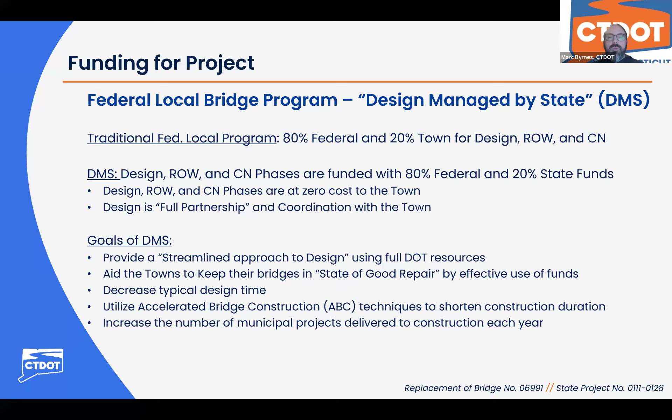I'll now turn it over to Maureen Nicholson, First Selectman in the town of Pomfret, for some remarks. Maureen?

Good evening. Hi, Maureen Nicholson, First Selectman, Town of Pomfret. I want to take a few minutes to express my appreciation for the Federal Local Bridge Program and its support in replacing the Day Road Bridge at no cost to Pomfret taxpayers. This investment delivers a meaningful benefit to our community by eliminating significant financial burdens on local residents while addressing critical infrastructure needs in a timely and responsible manner. In conjunction with the replacement of the Taft Pond and Bosworth Road bridges, this project represents a comprehensive and forward-looking effort to strengthen our town's transportation network. These improvements will substantially enhance safety, reliability, and accessibility for residents, emergency services, and local traffic.

Equally important, the longevity of these new structures, designed to endure for decades, will help stabilize future infrastructure costs and reduce the likelihood of costly emergency repairs. We've experienced both of those. This long-term view ensures that Pomfret is not only addressing current needs, but also planning wisely for the future. Thank you to the team at CHA Solutions and Connecticut DOT and everyone involved in making these critical improvements possible. Your dedication to investing in resilient, high-quality infrastructure is deeply appreciated and will have a lasting positive impact on the Pomfret community for generations to come. Thank you very much.

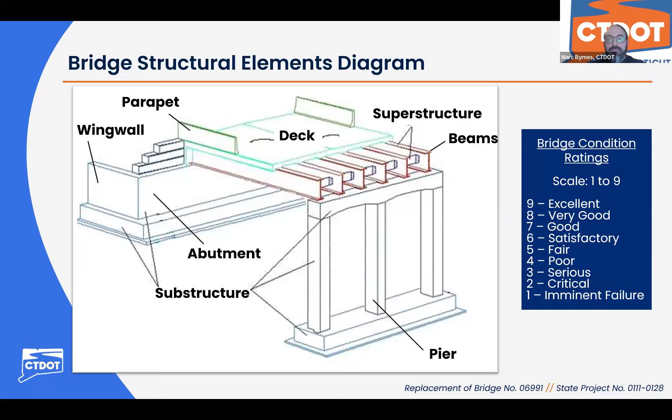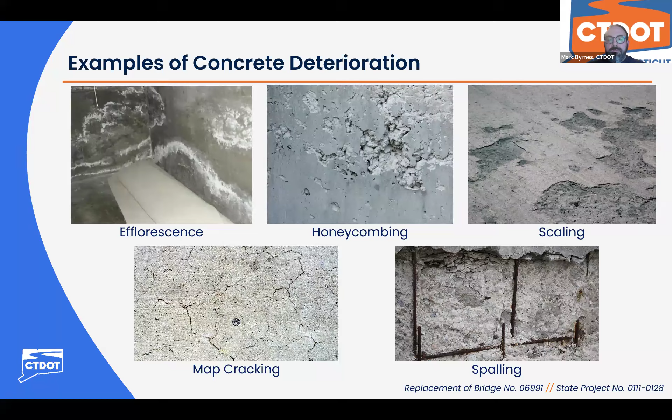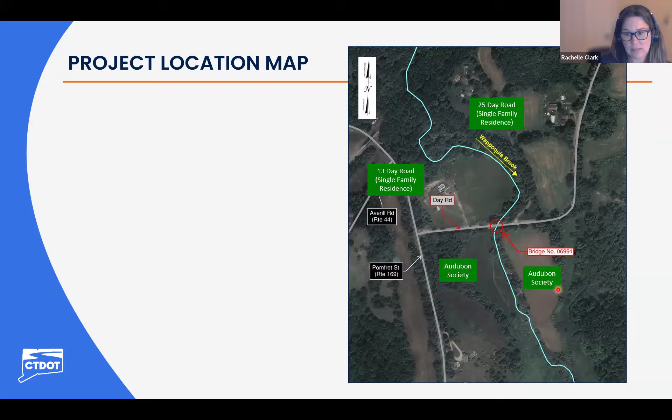Thank you very much, Marc. Bridge 06991, Day Road over Wappoquia Brook, is located approximately 50 feet east of Pomfret Street, Route 169. Wappoquia Brook runs from north to south below Day Road, which is oriented east-west. The bridge is adjacent to two residential properties, 13 Day Road, a single-family residence, and 25 Day Road, also a single-family residence, to the northwest and northeast of the bridge. Both the southwest and southeast properties adjacent to the bridge are owned by the Audubon Society.

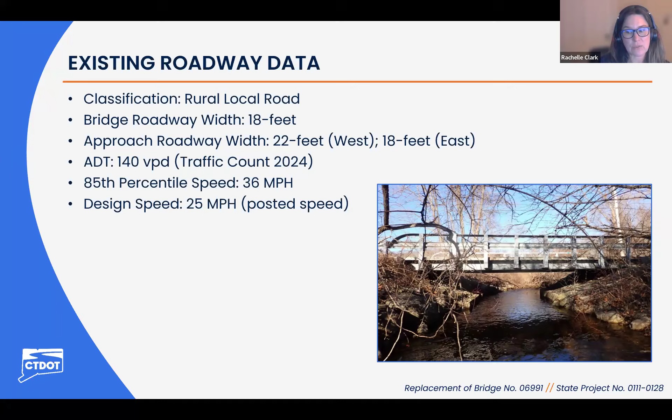Day Road is classified as a rural local road and has a bridge roadway width of 18 feet. To the west, the approach roadway is slightly wider at 22 feet, and to the east, the approach roadway matches the bridge at 18 feet. The traffic volume for this bridge is fairly low, at 140 vehicles per day. The 85th percentile speed is 36 miles per hour, meaning 85% of cars going over the bridge are at or below this speed. The design speed for the roadway is 25 miles per hour, which is also what is posted.

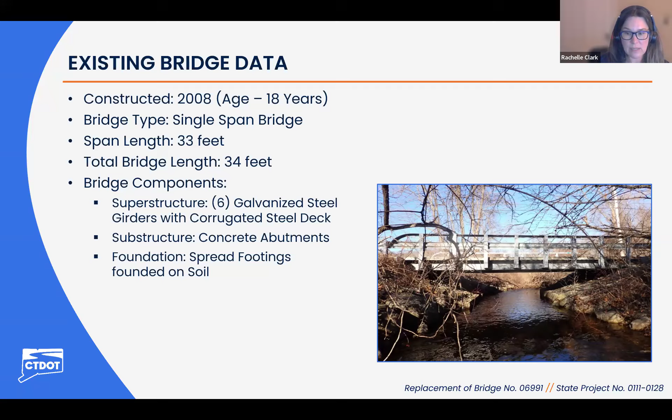The existing bridge is 18 years old and is a single span bridge, meaning it does not have any intermediate supports across the river. The bridge span length from center of support to center of support is 33 feet, and the total length of the bridge from bridge joint to bridge joint is 34 feet. The existing bridge is comprised of 6 galvanized steel girders supporting a corrugated steel deck, topped with bituminous concrete, frequently called asphalt. The substructure is comprised of concrete abutments and spread footings, which are founded on soil.

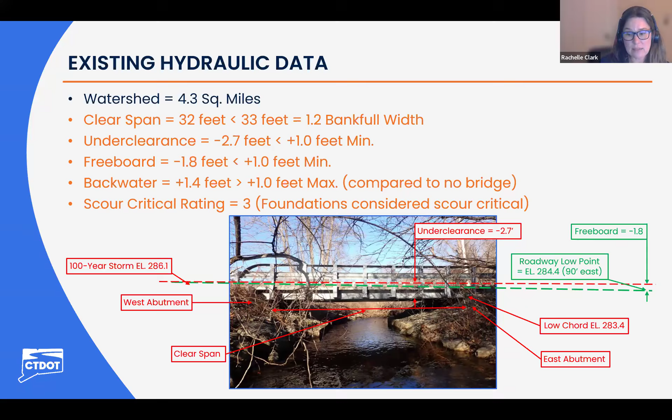The final criteria is related to the susceptibility of the bridge foundations to be undermined during a large storm event. This bridge has spread footings founded on soil, and they have been determined to be scour critical. This means that if there was a large storm, there's potential for some of that soil supporting the footings to be washed away. This is one of the primary reasons this project was undertaken.

Next, we are going to go over the condition ratings for this bridge, based on the latest inspection report, from 2023. As Marc discussed, condition ratings are from 1 to 9, with 1 being low and 9 being high. All of the components of this bridge, the deck, the superstructure, the substructure, the approach, the channel and channel protection, are rated as satisfactory, which is a 6 or above.

One thing to note is that these are condition ratings, and the bridge railing, while in satisfactory condition, does not meet current safety standards. Another thing to note is that while the bridge is in good condition, it does have a weight restriction. Trucks that weigh more than 31 tons cannot cross the bridge. As noted, this bridge is scour critical, so this project was not undertaken because the bridge has an excessive amount of rust or the substructure concrete has deterioration. This project is being driven by other criteria.

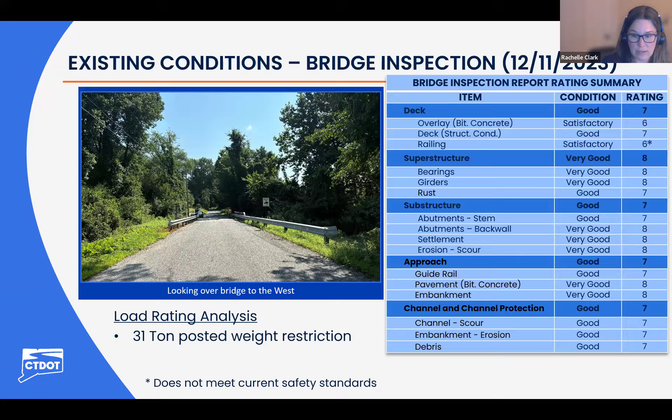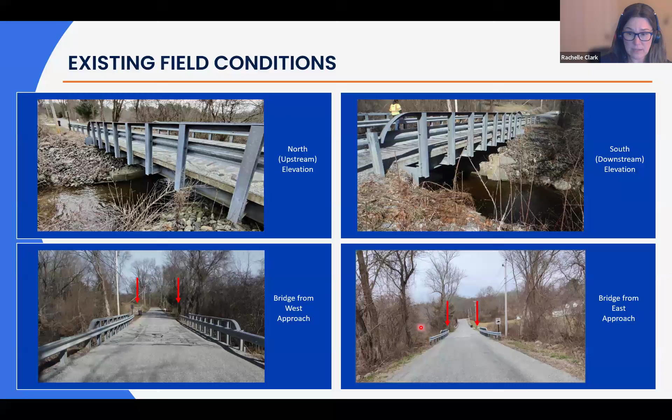The two red arrows show the locations of a residential driveway for 25 Day Road on the north side, and the arrow on the right is the location of a field access drive to the south onto Audubon property. The bottom right photo is looking across the bridge to the west. The red arrow on the right is the residential driveway for 13 Day Road, and the left arrow is the location of a pedestrian pathway onto Audubon property.

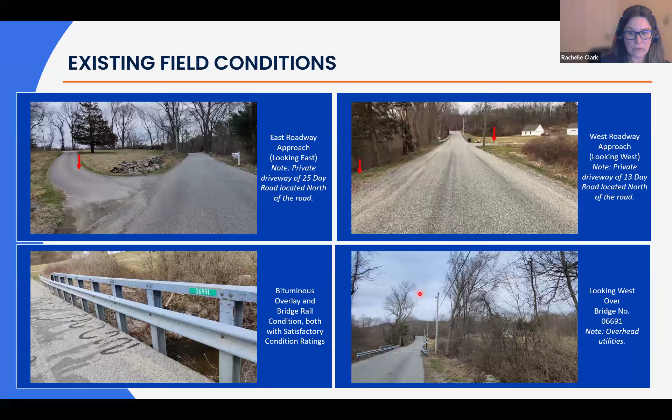And the bituminous overlay. You can see some of the repairs that have been done to that, which is also in satisfactory condition. Finally, the bottom right photo shows overhead utilities on the north side of the bridge. These will need to be temporarily relocated further north so as not to interfere with construction activities.

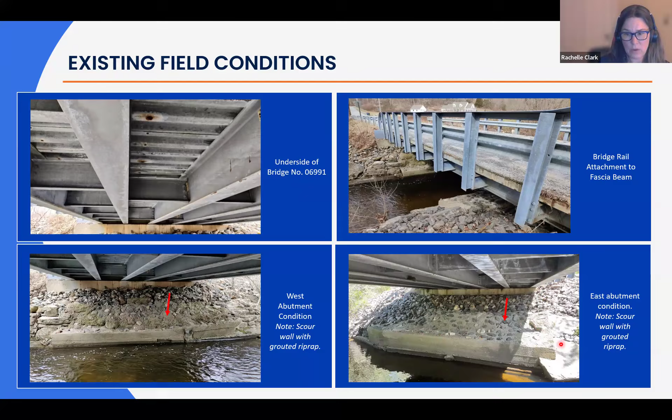You can see that portion right here. There's just a small amount of it that's not underground. The same on the other abutment. There's a small portion of the abutment that shows right where the bridge bears on the abutment. These two also show areas of partially grouted riprap and scour walls that are present along the river embankments.

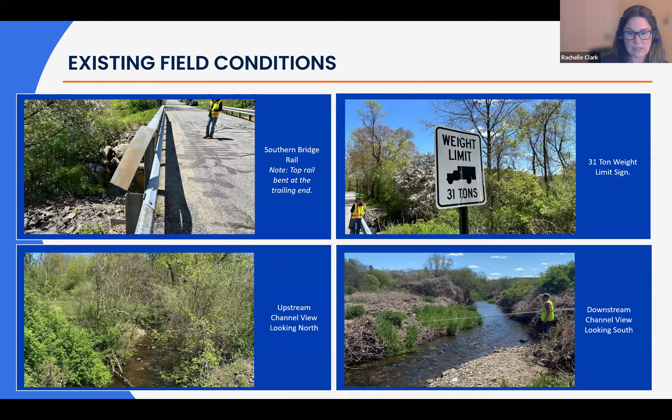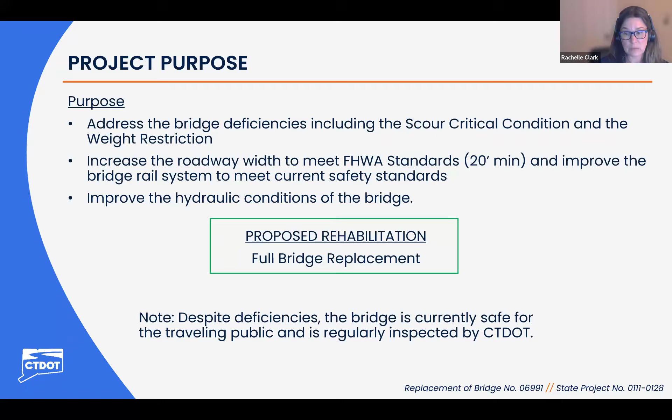The proposed rehabilitation is a full bridge replacement, as this is the most cost-effective way to address the scour critical condition. Options for just addressing the scour critical condition and strengthening the bridge were investigated, but were found to be more expensive than a full replacement.

The bridge will also be designed for potential scour in large storms, eliminating the scour critical condition. We were limited in how much the elevation of the bridge could be raised, but even so, we were able to achieve small improvements in the hydraulic adequacy of the bridge.

Speaking in more detail about the aesthetics of the bridge, the project proposes using a formliner for the end walls and the wing walls that simulate stone masonry. This will look similar to the photo in the slide. The open bridge rail will also be metallized to the color of the town's preference, which is dark brown.

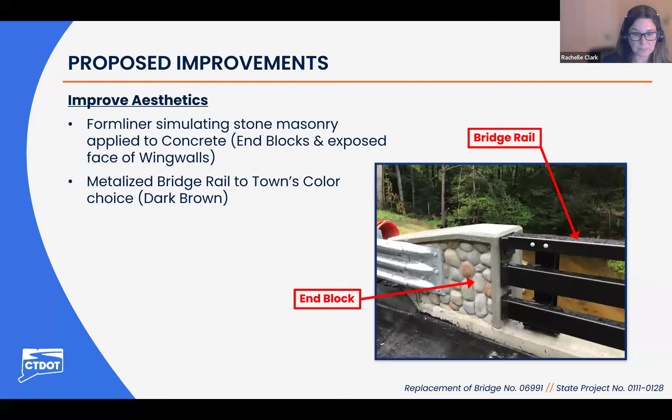This is a cross-section of the proposed bridge. You can see that there are two 10-foot lanes providing a 20-foot curb-to-curb width required by FHWA. The out-to-out dimension of the bridge is 23 feet 6 inches.

A three-tube bridge rail is mounted on each side of the bridge, supported on a concrete curb. The roadway will be supported by 3 inches of asphalt over a 6-inch topping slab, which is in turn supported by 7 prestressed concrete adjacent deck units.

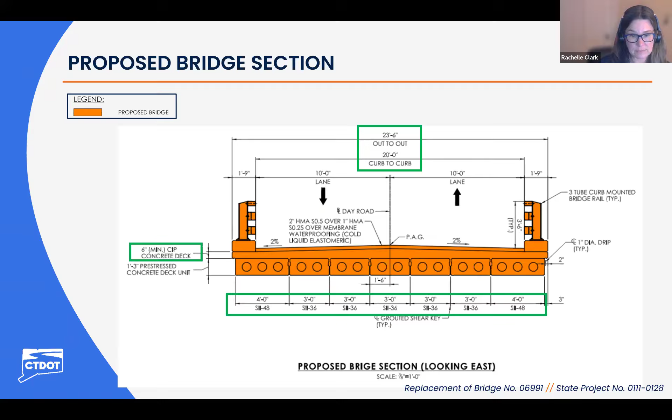This is the proposed bridge plan, a bird's eye view looking down on the bridge. The dark orange colors the bridge and the yellow indicates the approach roadways. The proposed bridge has a length of 36 feet from center of support to center of support. Below the bridge, the clear span between the faces of the abutments is 33 feet.

In this plan, the light blue, a cyan color, is the Wappoquia Brook, and the purple areas on either side of the brook are wetland areas, which are an important natural resource. The medium blue areas indicate riprap, which will be installed for bank stabilization.

The areas of light orange are where the surface of the ground will be lowered by cutting in and removing the soil, and the areas in light green are areas that will be raised by infilling with soil. This work will be done to smooth out the grades around the bridge to avoid overly steep slopes.

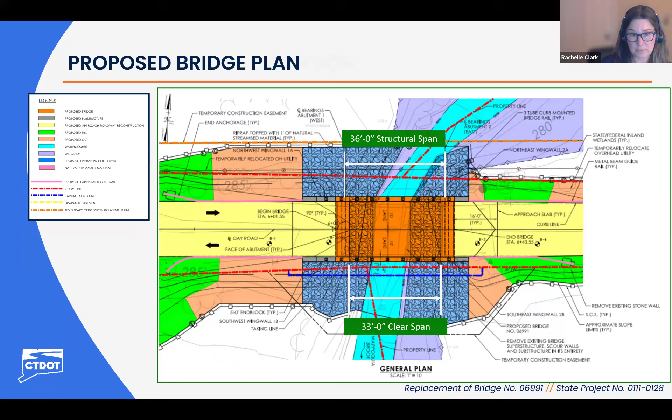This is a view of the elevation of the bridge looking to the north. The orange indicates the bridge, and you can see that the span from center of support to center of support is 36 feet. This is slightly longer than the existing span, which is 33 feet.

The areas in pink are the guide rail along the roadway approaching the bridge. Gray indicates the substructure. What is important to note about the substructure is that it is supported by steel micropiles, which are socketed into bedrock.

This is what's going to support the bridge in a large storm event and removes the scour critical condition that the existing bridge has.

Also in the gray area, you can see that we have shown the end blocks and the wing walls with the simulated stone form liner. The light blue cyan area, again, is the Wappoquia Brook, and the blue is the riprap bank stabilization.

You'll also notice a light pink area. That is natural stream bed material that will top dress the riprap in areas where the stream will flow under normal conditions. As I noted before, we were limited in how much we could raise the bridge, but our hydraulic criteria does see some improvement.

For the proposed bridge, the 100-year storm elevation is 285.3 feet, which is just about at the height of the roadway. The underclearance of the bridge is negative 2.3 feet, the freeboard is negative 1.1 feet, and the backwater is 0.6 feet.

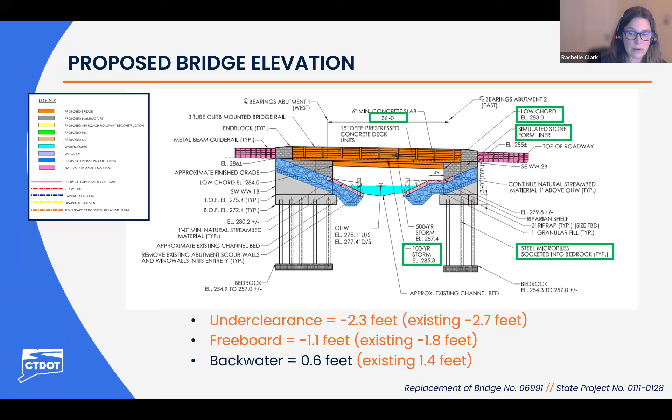Overall, each of the criteria were improved, and the backwater now meets the desired design criteria.

This is a plan view of the roadway. Again, we have Wappoquia Brook shown in the light blue cyan. The wetlands are shown in purple.

The areas of riprap bank stabilization are shown in blue. The bridge itself is shown in orange with the reconstructed approach roadway shown in yellow. North and south of the roadway, we have areas of fill in light green and areas of cut in light orange. Additionally, in this plan view, you can see that we have two driveways shown in brown.

These driveways will have new asphalt aprons to tie into the reconstructed roadway.

On the south side of the bridge, you can see that we have an area in brown that is a pedestrian access to the Audubon Society property. Even though this is shown in brown, it is not going to be asphalt. It will remain natural grassy areas.

However, this area extends further south, simply to improve the slope of the pedestrian pathway down to the Audubon property, so that the grade will be more comfortable for hikers walking this way.

You'll also notice that to the northeast, there's a new catch basin and outlet. This will allow water at the low point of the roadway, which is near the driveway to 25 Day Road, to leave the roadway and be discharged into the Wappoquia Brook.

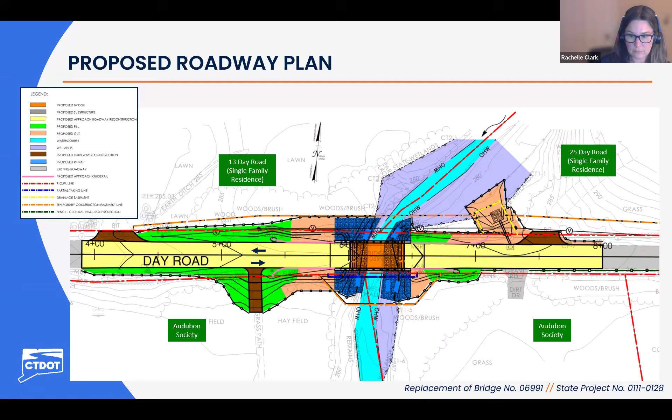This is a view of the proposed roadway profile. The bridge is shown in orange, areas of fill are indicated in green, and areas of cut are indicated in light orange. There's a small area of light orange to the east side of the bridge, which is a little hard to see in this view, but mostly the takeaway is that we have fill on the west side and a small amount of cut on the east side.

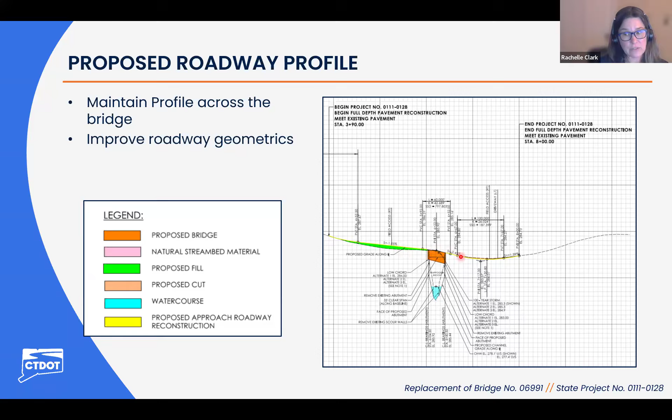The proposed roadway elevation is shown in yellow, and the existing roadway is shown as a dashed line. So we are maintaining the existing profile across the bridge with some slight improvements to roadway geometrics so that the vertical path of travel is a little bit smoother.

The work to replace the bridge is proposed to be done utilizing a detour. The project site, indicated as the hatched area, will be closed to through traffic. Vehicles will detour around the site using Day Road, Needles Eye Road, and Pomfret Street, which is Route 44. The detour is a total of 2.6 miles in length.

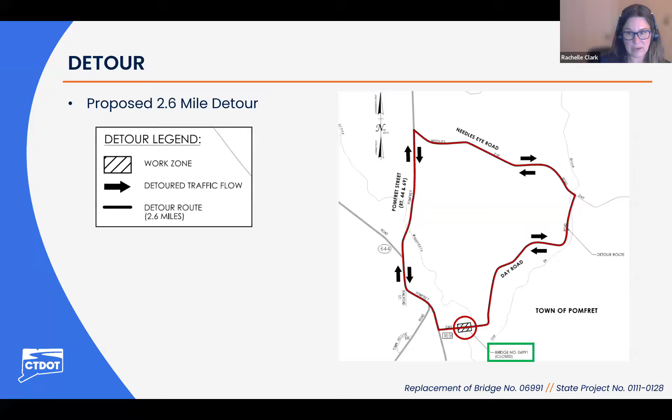When we plan bridge projects, we also take into account both utility impacts and historical impacts. There are no underground utilities at the bridge, but there are utilities on the north side of the bridge that will be temporarily moved further north during construction. The utility services will be maintained, but moving them will allow the contractor to perform work without conflicts from overhead wires. As the project winds down, those utility lines will be moved back closer to the roadway.

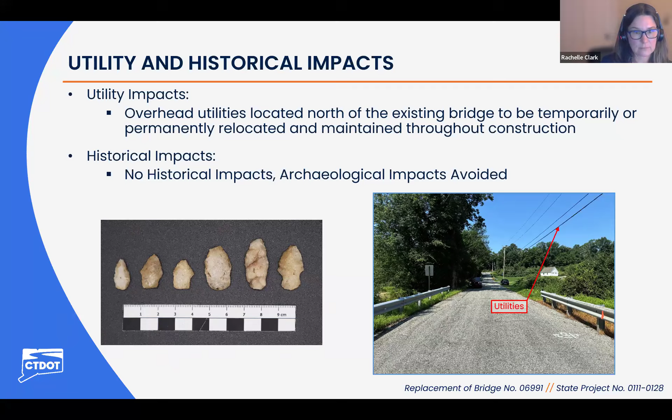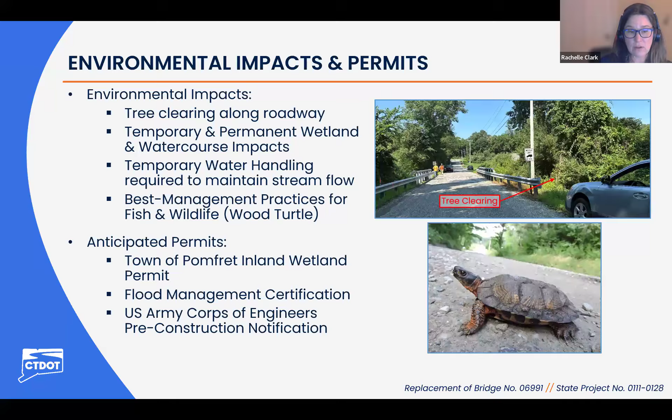Anticipated permits include the Town of Pomfret Inland Wetland Permit, the Flood Management Certification, and the U.S. Army Corps of Engineers Pre-Construction Notification.

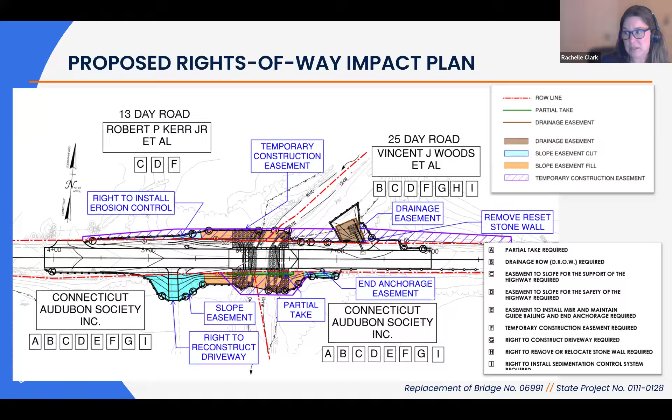As mentioned in the presentation, this project will require the acquisition of property rights, so I'd like to give a brief overview of our acquisition process. Any required property rights will be acquired in accordance with Connecticut General Statute Section 13A73 and 13A98E, as well as the Uniform Act. Additionally, the specific right-of-way impacts are still being finalized and may change as the project design progresses. As Rachelle mentioned, there are different types of impacts to private property, such as partial acquisitions, easements, and temporary rights. Next slide, please.

The right-of-way acquisition process begins once the project design has progressed to a development milestone and all impacts have been determined. At this point, each affected property owner will receive from our office a formal letter of intent to acquire, along with a property map depicting the specific property rights being acquired from each individual property.

Next, our office will determine the fair market value of those property rights, which will be used to establish an offer of just compensation. That offer will be sent to the property owner in writing, and a right-of-way agent will be available to meet with the property owner to explain the project, go over the specific impacts to their property, and explain the department's offer.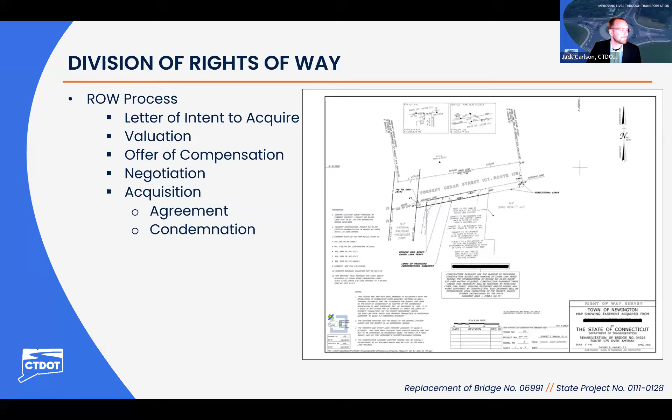In terms of the project schedule and cost, this project is anticipated to go into construction in spring of 2028, subject to making sure the project has acquired all property rights of way and permit approvals. The construction duration is anticipated to be one season from the beginning of April to the end of November, about 8 months. The cost of this project is anticipated to be $3.2 million.

That is paid for through 80% federal funds and 20% state funds. As Maureen mentioned, this project is being undertaken at no cost to the town. Please note that the cost and schedule are preliminary and subject to change.